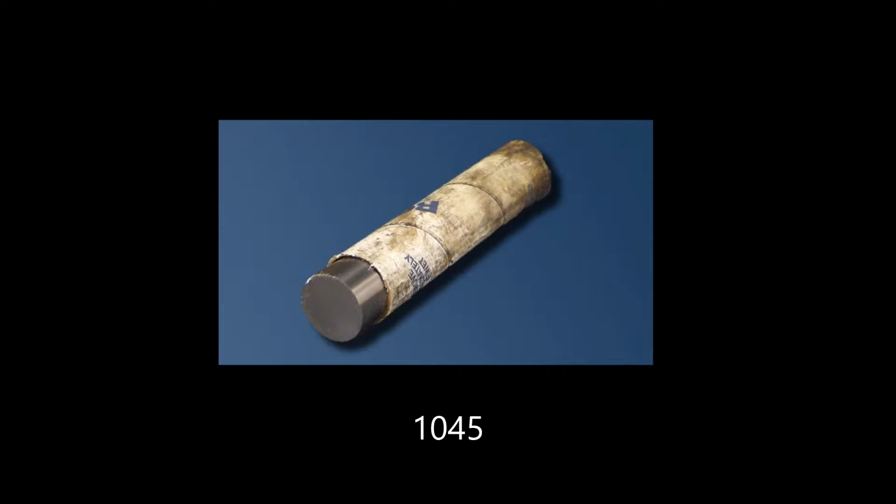The objective of this lab was to demonstrate the mechanical properties of several different samples of steel alloys through a tensile test. 2 of these samples were 1018 steel and 2 others were 1045 steel. To obtain the engineering stress and engineering strain graph, we connected a computer to the tensile testing machine.

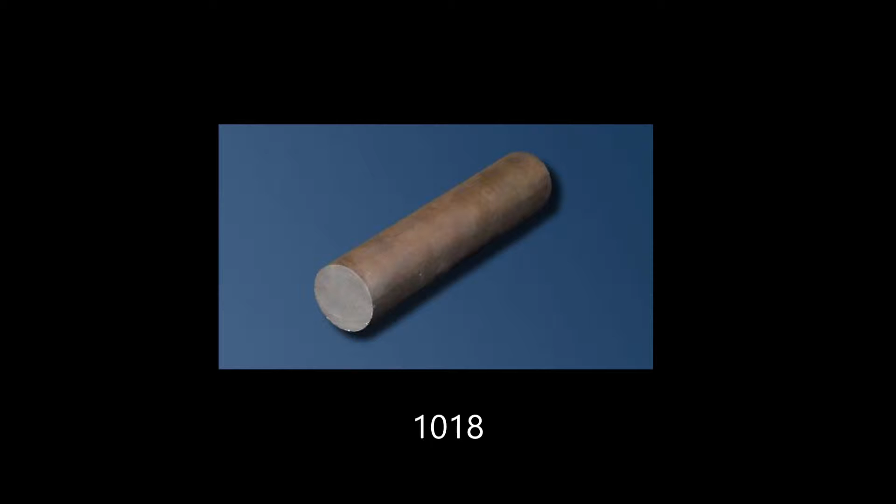The equipment we used in the lab is as follows: 2 samples of 1018 steel, 2 samples of 1045 steel, a caliper, red marker, Instron 4411 universal testing system, extensometer, computer with graphing capabilities.

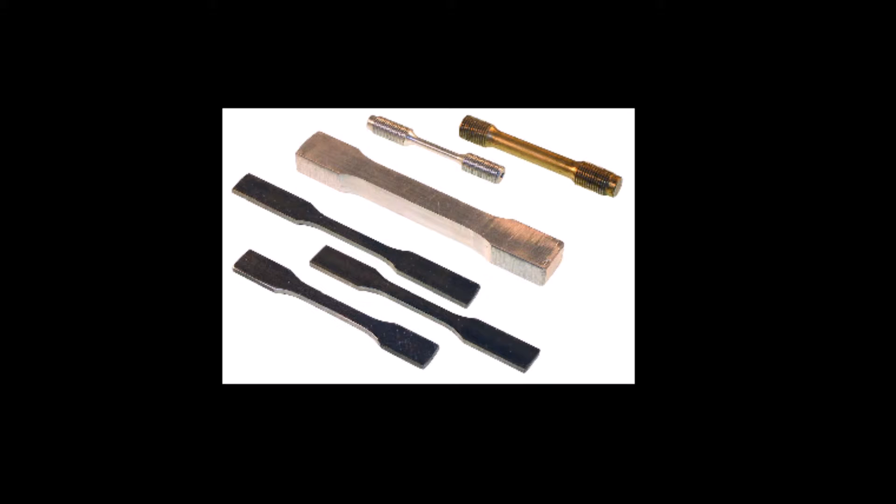Samples used for tensile testing typically exist in a dog bone configuration as shown. These samples are manufactured to certain length and diameter specifications. In this particular lab, the 1018 and 1045 samples were pre-thinned. This was done so as to obtain a smoother stress versus strain curve.

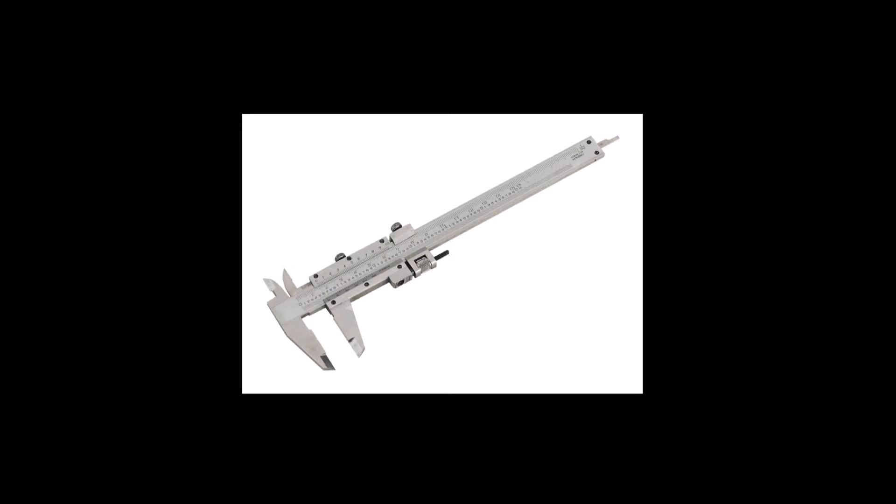The experiment began by first taking the dimensions of each sample using the caliper. This includes the diameter of the narrow bar section, the gauge length, and the radius of the wider ends of the sample. After these measurements, the narrow bar section is marked with 2 vertical lines, and the distance between the lines is measured with a caliper. These lines are later used for measurements as to the distance displaced between the pre-tested and the post-tested sample.

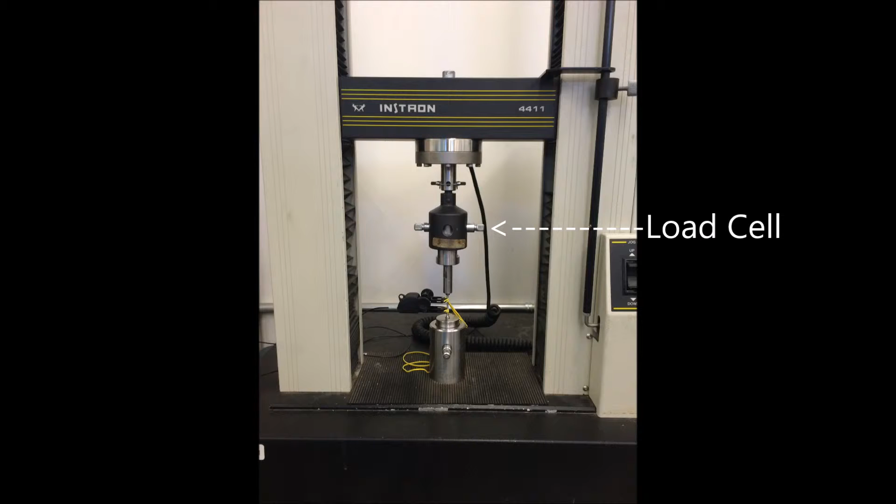The machine used in this lab is the Instron 4411 Series 9. It is a standard electromechanical testing system. The testing system consists of several components: a crosshead, load cell, grips, extensometer, and control panel. The specimen is set between upper and lower grips, and then the extensometer with rubber bands next to the specimen is set as well.

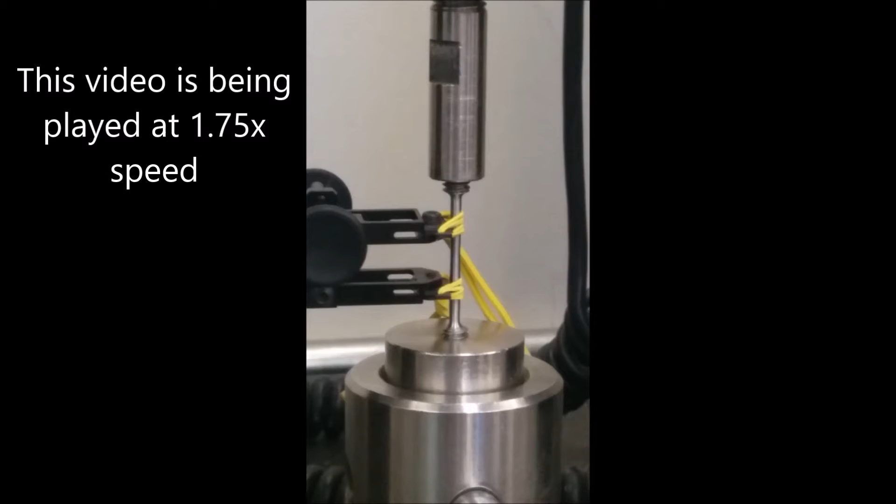For this particular video, an example of the tensile testing of one 1018 sample is portrayed. After the sample has been readied for testing in the Instron machine, the initial diameter of the sample is entered into a computer, and the extension rate of 1 mm per minute is set. As the load is applied, the data is collected and automatically sent to a computer so that the progress of the load versus elongation curve can be observed in real time on a monitor.

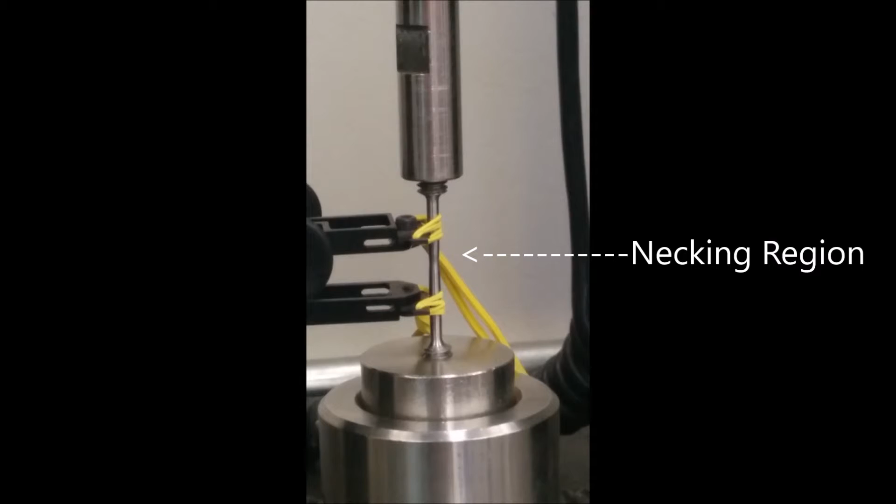The load is applied to failure. During the test, necking gradually occurs and the narrow section of the sample gets thinner and thinner. When failure happens, a noise accompanies the fracture and the sample breaks into 2 pieces. The computer monitor shows the fracture point on the load elongation curve. After fracture, the curve slopes down to 0.

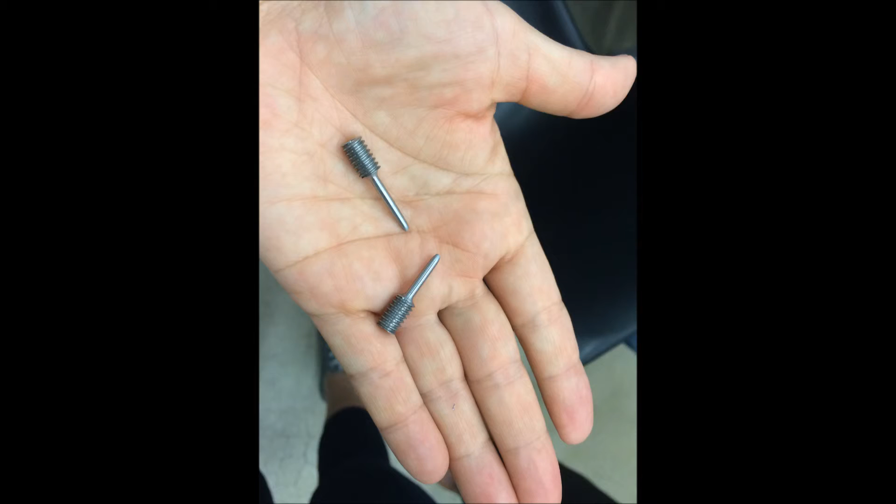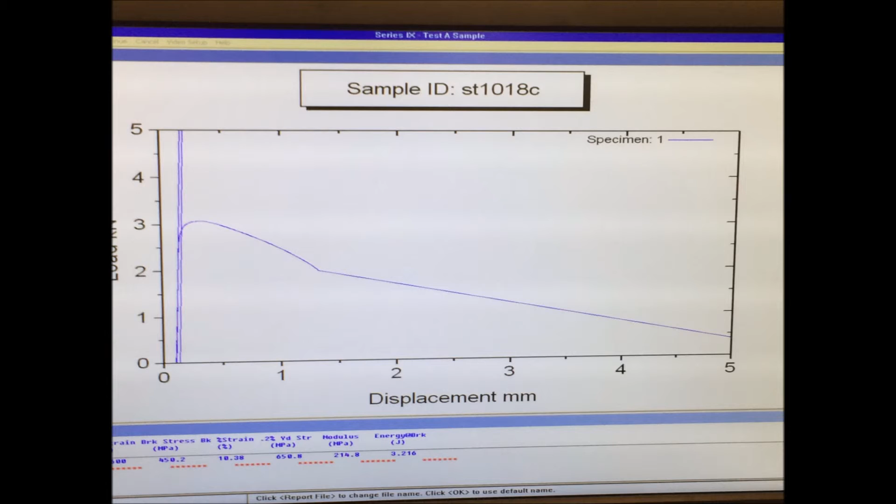After the sample has fractured, it is removed from the grips of the Instron machine, and the broken pieces are held together so that the distance between the initial red gauge marks can be measured for final elongation. The neck diameter is also measured. The load and elongation data is downloadable. With the proper software, this data can be used to plot a stress versus strain curve for further analysis. From pre- and post-test measurements, calculations as to the engineering and true stress and strain can be made.

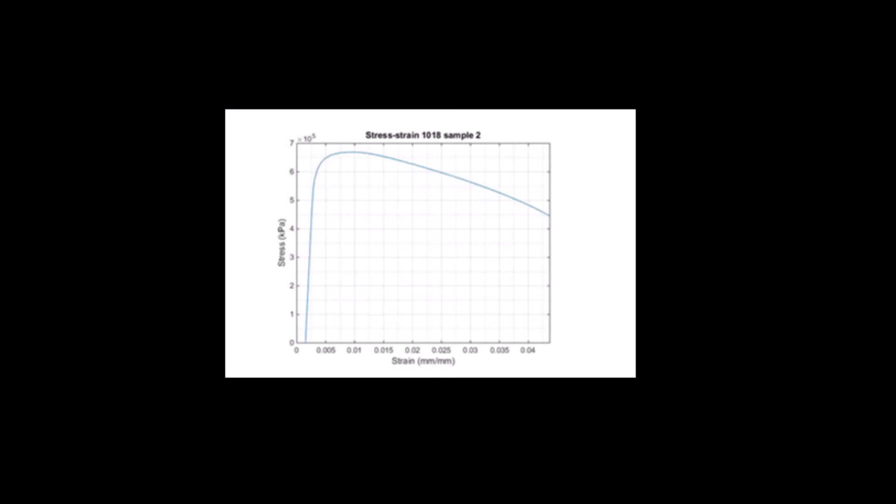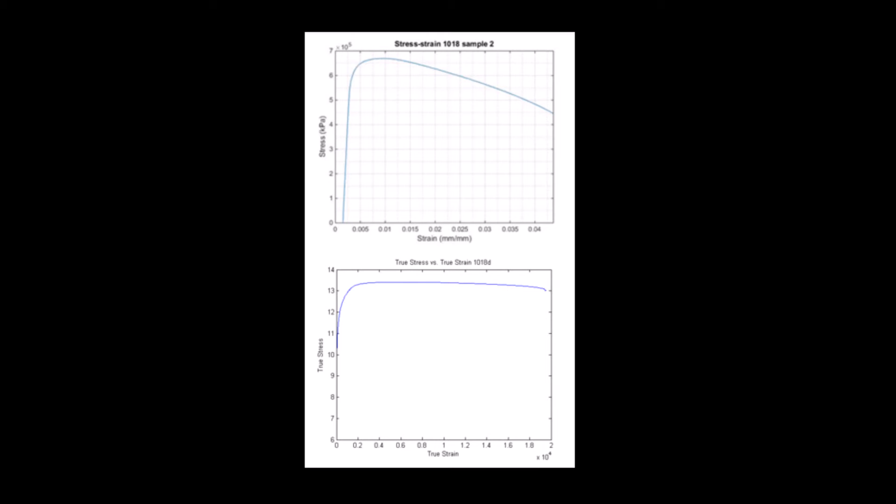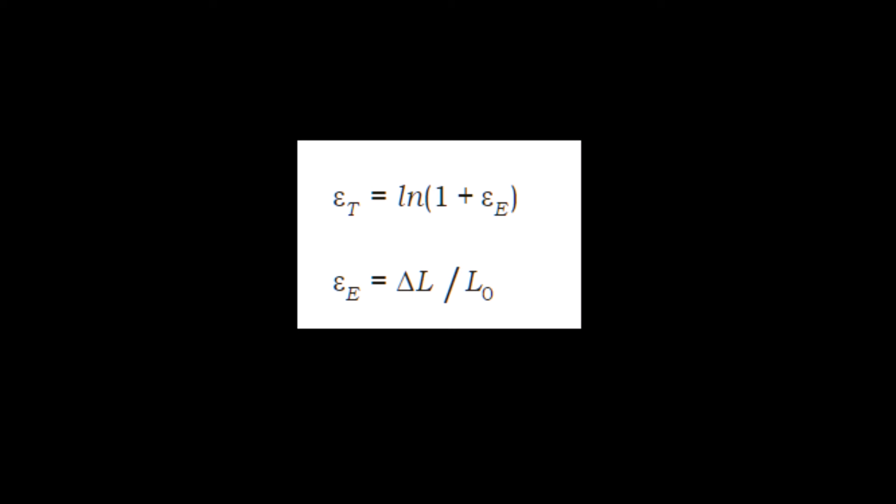Using the data from the test session, true stress versus true strain and engineering stress versus engineering strain plots can be made. But what are stress and strain? Engineering stress is the applied load divided by the original cross-sectional area of the specimen. True stress is the load divided by the actual cross-sectional area of the specimen at a certain load. Engineering strain is the amount the material deforms per unit length in the tensile test. And true strain is related to the current length during the test divided by the original length.

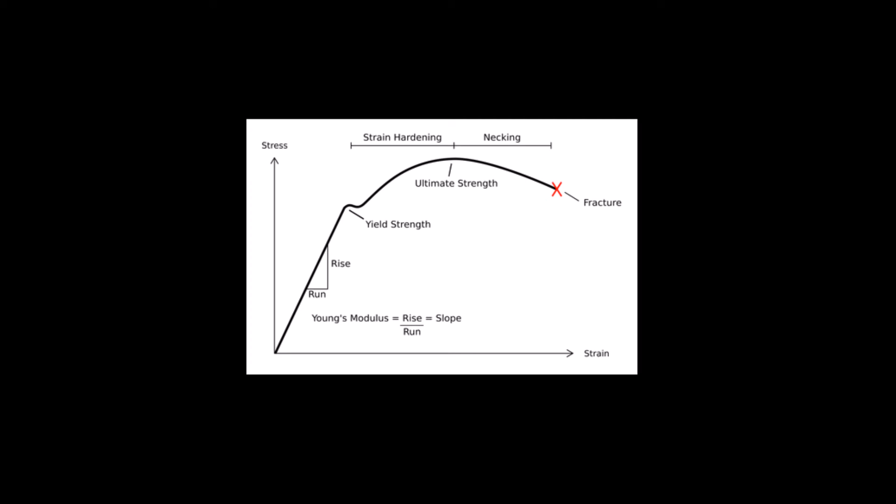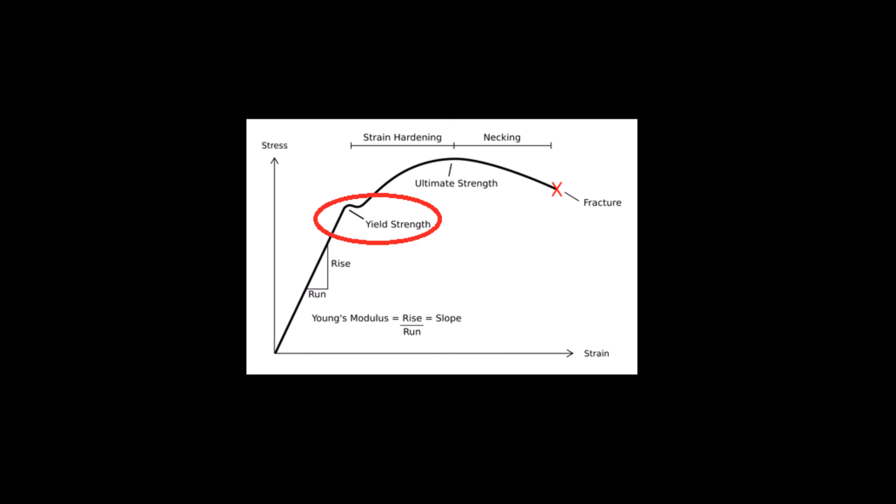From these curves, the elastic or Young's modulus can be found by determining the slope of the initial linear region, known as the elastic region. The yield point is where the material starts to deform plastically, which is where the curve is no longer linear. The ultimate tensile strength occurs at the peak of the plastic region. Necking occurs beyond the ultimate tensile strength, where the load starts to decrease.

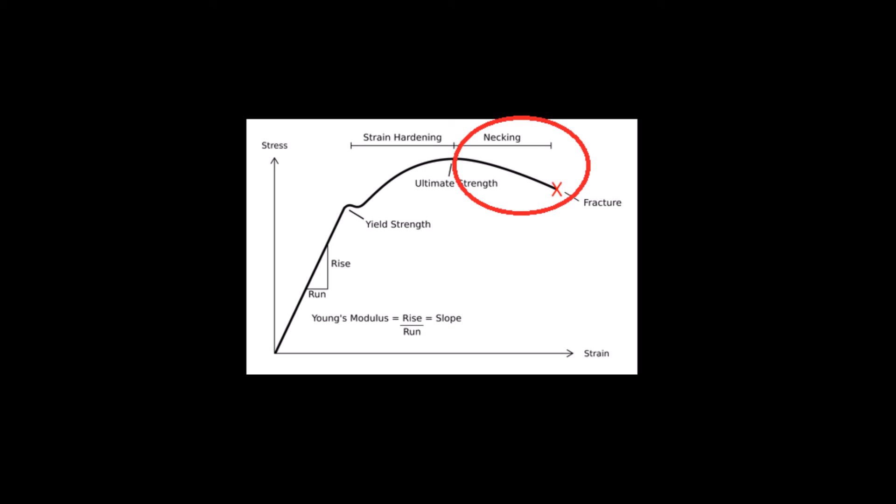Overall, experiments such as the tensile tests performed here are important for determining material properties. Without information about these properties, we'd live in a much more hazardous world.